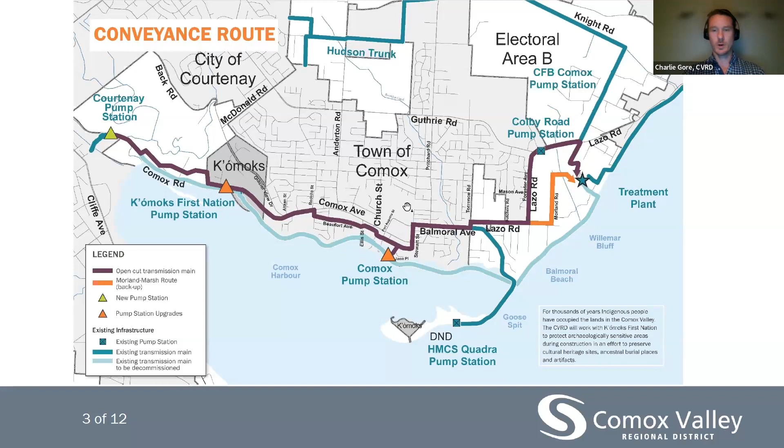So one of the changes that we had to make because of the change in routing and change in construction methodology was changes to the groundwater monitoring.

So we had selected several wells throughout your area to monitor based on the horizontal directional drilling plan for the project. With a change to open cut methodology along Lazo Road, we've decided to move several of those wells so that they're closer to the new alignment, and that there's a larger proportion of shallow wells that is more indicative of the shallow nature of the pipe.

These wells will continue to be monitored throughout the construction. We already have a really good baseline from all the monitoring we've done prior to construction, and we will be continuing to monitor these after construction and doing annual reporting on the results, which we'll be publishing to the CVRD website.

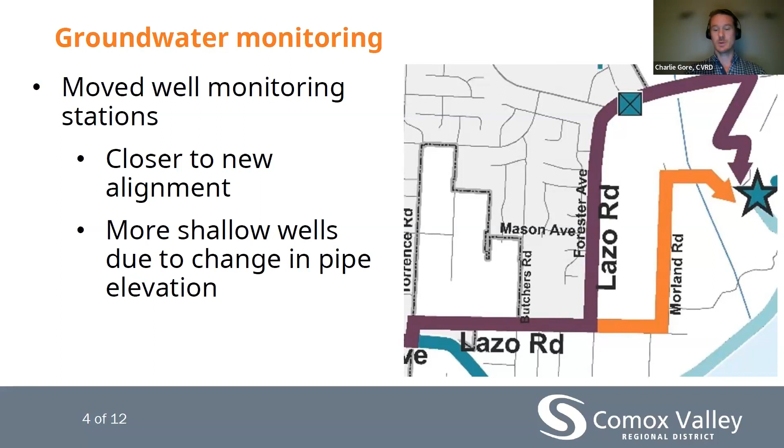One of the major changes that came about from this change in construction methodology was that the previous groundwater protection policy referenced horizontal directional drilling, and we needed to update the policy.

So as we were moving through this work and continuing to look for better ways to protect the groundwater in the area, you'll see here that we've made a major change to the acoustic monitoring and real-time leak detection of our system.

What we found as we moved to an open cut methodology was that the pressure in the pipe is so low that the acoustic monitoring, which relies on hearing the sound of the wastewater leaving the pipe, was actually not possible. In parallel with that, we were able to identify real-time leak detection that we could install as part of the construction and have operational from day one.

So we see this as a major positive change that we've made on the project, where instead of having annual acoustic monitoring for leaks, we are moving to real-time leak detection that will be constantly measuring along the pipeline to feel for any potential leaks.

This was a potential future promise that was made by the CVRD, that we would continue to monitor the market to see if it was feasible, and we're able to implement this on day one.

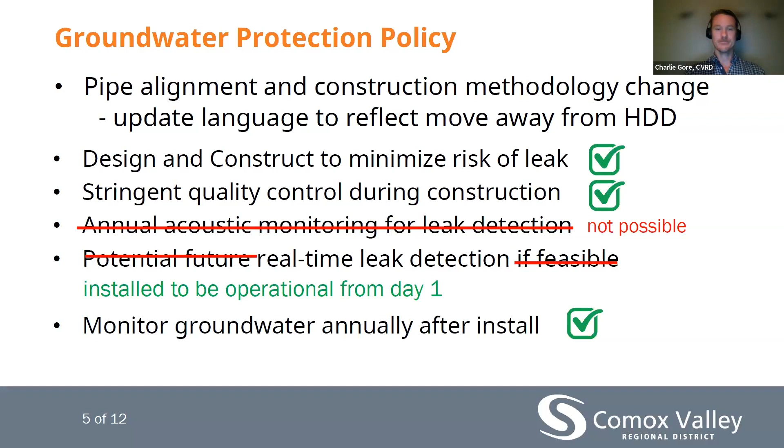So this real-time leak detection system that we're planning to install, and that the Sewage Commission approved in our last commission meeting this week, will be these two red cables here you can see in the cross-section of the pipe, installed on both sides underneath the pipe. They're unique fiber cables that can measure any temperature fluctuations along that pipeline.

As you can imagine, if there's any leak in sewage coming from this pipe, the sewage is far warmer than the natural ground temperature or any groundwater that's there. That leaking sewage would raise the temperature of these cables, and the light passed down these cables can pinpoint the location where that temperature fluctuation occurs. This information will be constantly pinged along these fibers and monitored by a real-time system at the wastewater treatment plant that will alert our team if there are any fluctuations as the pipe is in operation.

The unique thing about this system is it's able to learn the natural fluctuations in ground temperatures over time. Groundwater will come up and down around this pipe, so there will be fluctuations in the temperature these cables experience. But that differential, if there were ever to be a sewage leak, would be so drastic it would alert us immediately, and it would also pinpoint the location such that our teams could get out there, excavate, and investigate.

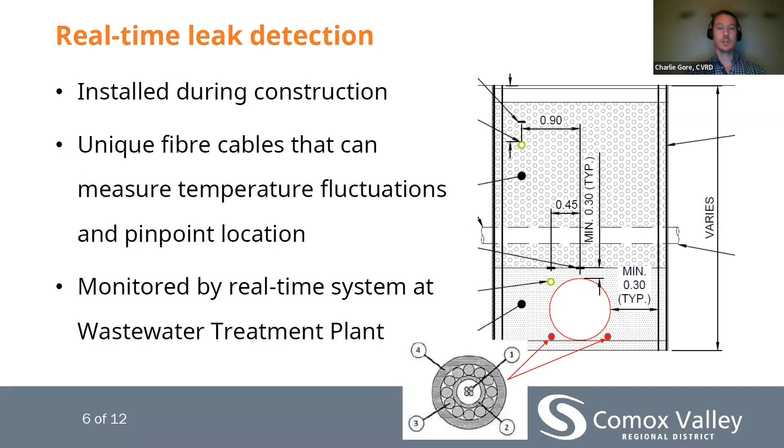The second major change that's come about due to the change in routing and construction methodology is the impact to traffic in your area. Because of the narrow width of Lazo Road, there's going to need to be rolling block closures as we build the pipe along that road.

We are going to be locating the pipe within the road to minimize any tree losses along the corridor. There's beautiful trees throughout Lazo Road, and we intend to have very minimal impacts to any vegetation in the area. So we want to keep that pipe within the road, which is going to have traffic impacts.

But one of the lovely things about the Lazo Road area is there's lots of potential detour routes and roads to move people around and make sure access is maintained to all streets and all residents at all times. But there are going to be some traffic impacts as we move through that area.

We are looking at using the fire gate on Brent Road when we are constructing along Brent Road, because again, the width of that road is so narrow and we want to minimize our impacts around that road. So we're going to plan to use that fire gate when necessary.

The way that this traffic management strategy will be transferred into detailed traffic management plans will be through working with our contractor. 2 to 4 weeks prior to construction, we will ensure the area is very well informed with letter drops, announcements, and information on our website so that everyone is fully aware of how these detours will work and how the detailed traffic management plans will operate while we're constructing in your area.

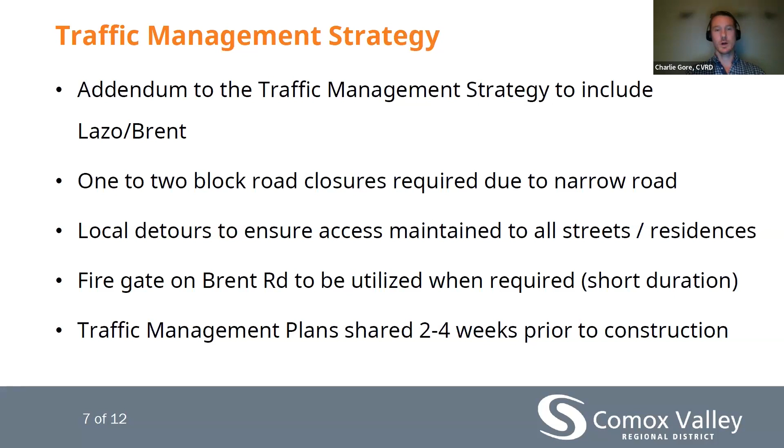So the construction schedule for this work, you can see here up on the screen. As I mentioned before, there are 2 different contractors. Knappett Industries, part of the Maple Knappett joint venture, will be building the pipe through Area B.

They're planning to start in August next year and be complete by the end of 2024. We don't have an exact sequence of how they'll be working throughout the Lazo Road area, but we do know they want to get the crossing of Lazo Marsh done while the ground is at its driest. We expect that to happen around September, and they will sequence their work to make sense for the welding of the HDPE pipe, moving through this area in the latter half of 2024.

Knowing that many of you will commute through the town of Comox, there'll also be construction from spring until summer within the town of Comox. That's planning to start on Beaufort Avenue, just east of the downtown core near Jane Place, and the construction will move eastwards, up Stewart and down Balmoral, such that the contractor is complete there by the end of summer.

That same contractor will then mobilize back to downtown Comox and start to move westwards, away from Area B, towards the top of Comox Hill.

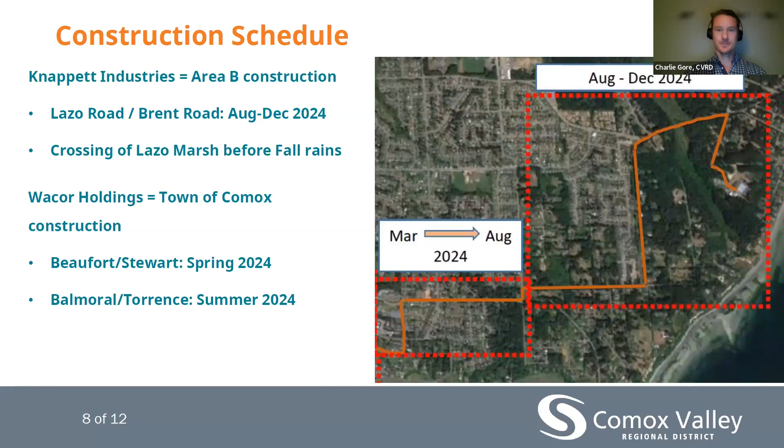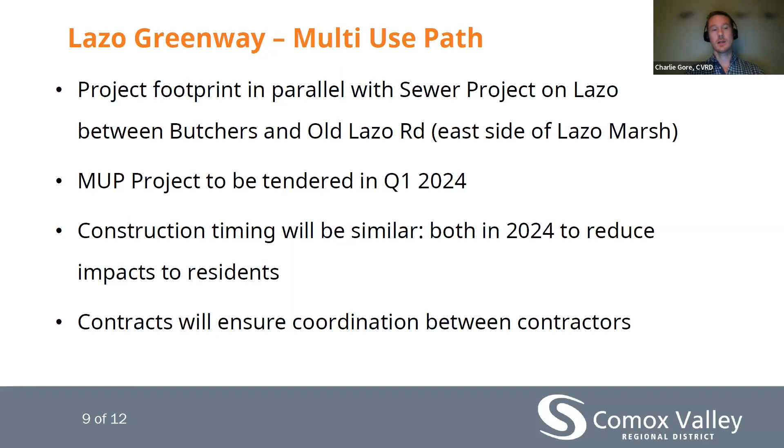As many of you know, there's another project that CVRD are managing on a very similar footprint through the Lazo Road area, and that's the multi-use path. It's still very much going ahead and is planned to go out for tender in early 2024. The footprint is mostly parallel and separate from the sewer project, but there are some areas, like around Butcher's Road and Old Lazo Road, where there's crossover, and we'll be working closely with the parks team to make sure the two contractors are well coordinated, minimizing impacts to residents while avoiding any rework between the two contractors. Both projects will be happening through 2024, so by the end of the year we should have a really beautiful finished product with the parallel multi-use path for residents of the area.

One of the last things I wanted to walk through is that a pipe of this size has air management and air valve kiosk considerations we're still in detailed design on. As we go up and over the topography of Comox Hill and Lazo Hill, there's a fluctuation of air that comes in and out of the pipe. We'll have kiosks installed along the entire length of the pipe, from the Courtenay Pump Station all the way through to the wastewater treatment plant, including spots along Lazo Road. These kiosks and locations are still in detailed design, and because the area through Area B is being done as a design-build, the details will be known in spring and summer of next year. We'll be doing further engagement on those prior to moving to construction.

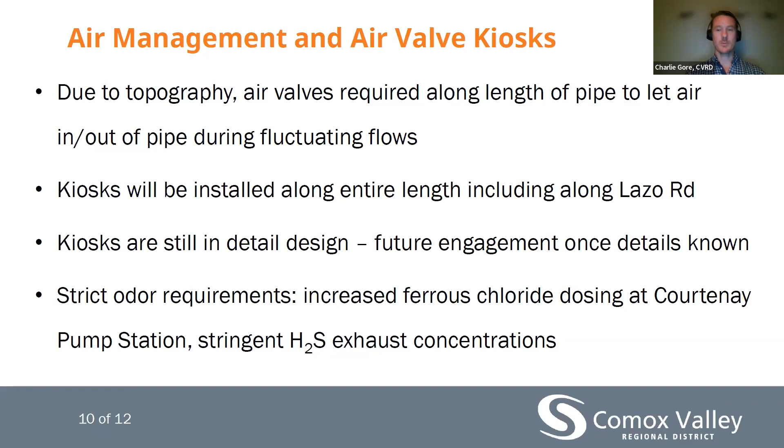I want to assure all residents that there are very strict odor requirements on these. If you've ever walked over a manhole in downtown Comox in the middle of summer and smelt a whiff of sewage, it's not going to be anything like that. There are extremely stringent odor requirements on these air kiosks, plus additional measures like dosing ferrous chloride at the Courtenay Pump Station to minimize even the need for odor control. This will be extremely tightly regulated by the project specifications, and we're very confident in the final product that will be experienced by your neighborhood.